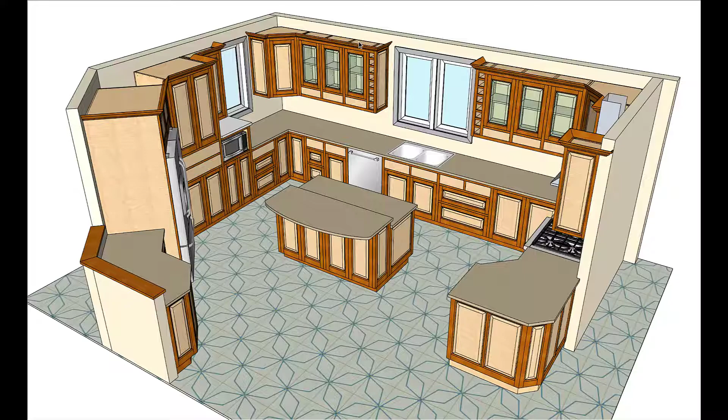Let's begin with CabWriter 5 new functionality. The first new piece is one-piece shaker style. This style applies to doors, draw fronts, end panels, and back panels. It's meant to emulate the simple shaker style of CabWriter, but in a one-piece design that's millable on a CNC machine, so CabWriter will produce the DXF files required to cut these on a CNC machine.

Let's take a look at our typical simple shaker style and convert it to one-piece shaker. The model you're looking at is our typical factory default settings shaker style cabinet. You'll notice the face frame parts are 5-piece parts: 2 stiles, 2 rails, and a panel.

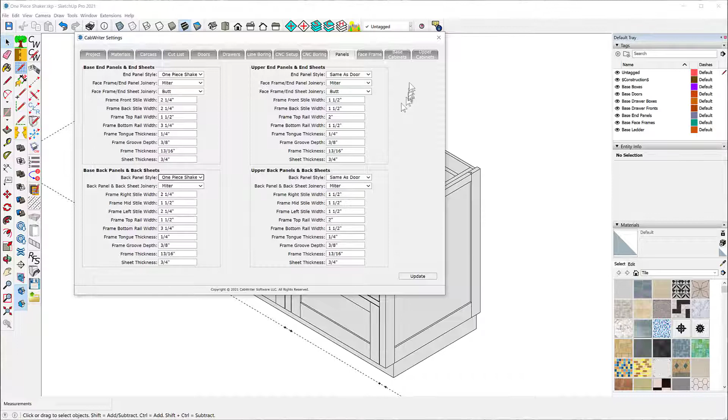The next thing we're going to do is go to the Doors tab and select one-piece shaker. You can do this for the upper as well, but right now I'm just dealing with the base cabinet. I'll go to the Drawers and select one-piece shaker, and I'll go to the panels. For the end panels, I can either leave it as same as door or choose one-piece shaker, and it'll do the same thing for the back panel - one-piece shaker. Now I'm all set, I'll update that and close it.

Now I'm going to redraw this cabinet, but not using the stored defaults, rather the defaults I just set up. So now take a look at this cabinet - notice this end panel is a single part, just one piece with a field milled out of the middle so it looks like the basic shaker style end panel. The same with the doors and drawers - notice those are one-piece parts.

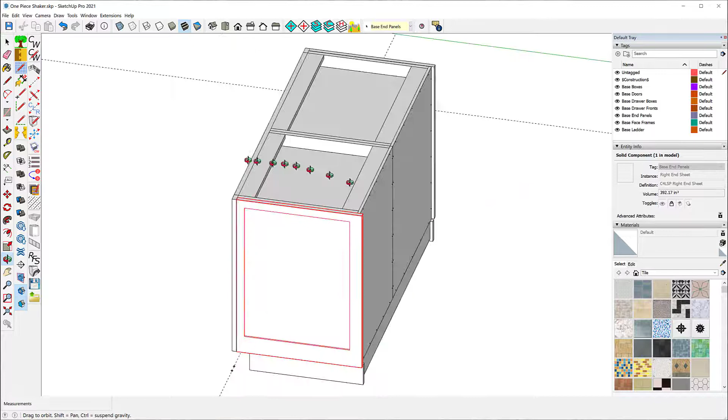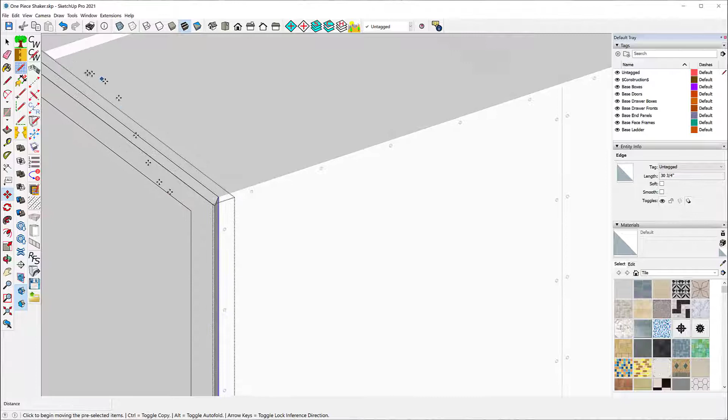Now I want to add a back panel to this. To do that I'll have to edit it a little bit, so I'll unlock it, edit, and bring this in. Let me see what I have to do here - that's 1/2, I have to add 1/4 of an inch, so I'll bring this out 1/4, and bring that part back in here like that. I'm not going to bother doing the other end - actually I have to, so let me do that real quick.

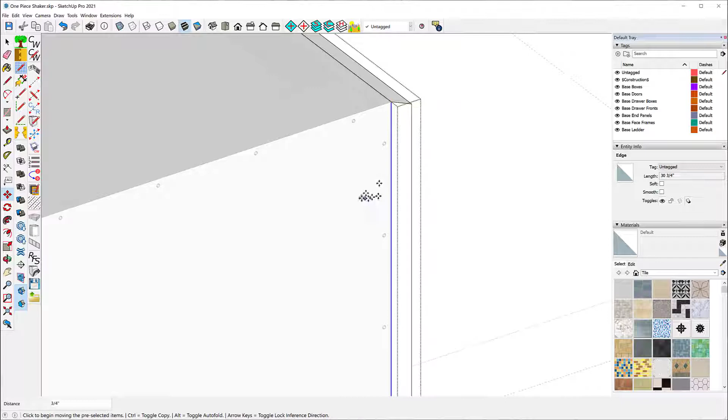Now I'm going to put a back panel on here. I'm going to take note of the cabinet I'm working on, it's cabinet C4L. I'll select this upper line and divide it by 3 - I'll just type 3 into the data field. Now I'll add the vertical lines.

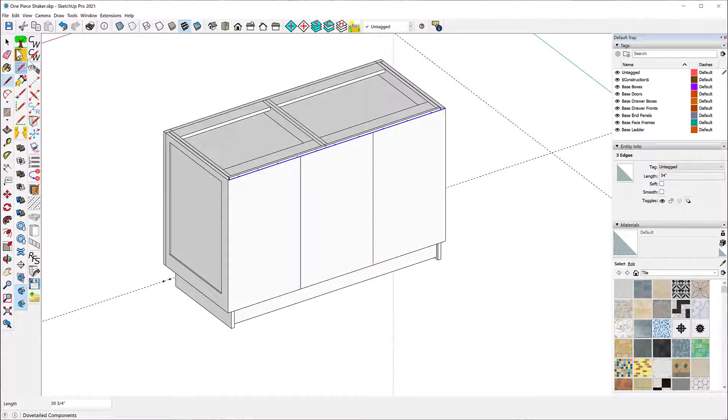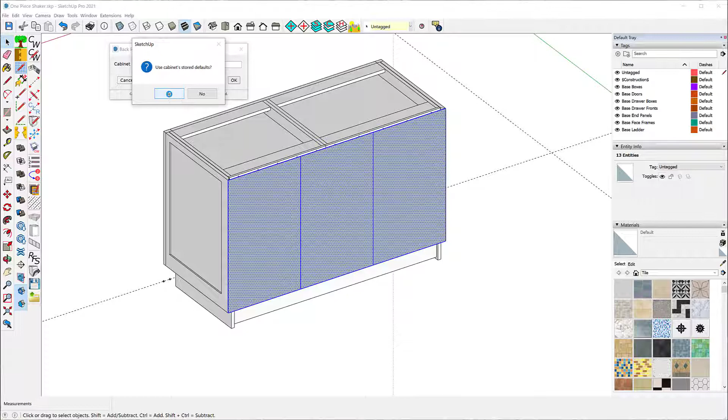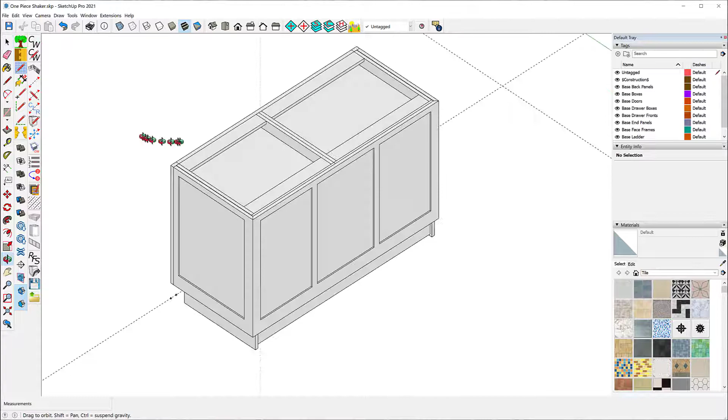And I'm going to add a back panel, C4L, using the stored defaults - yes, that's the cabinet I'm thinking of. And there you go - now I have a back panel, also in the one-piece shaker style. That's as simple as that. You can mill these parts on a CNC machine, and of course they'd be made from some kind of engineered sheet good material.

Now let's go on to the next new piece of functionality. For a long time now, some of our users have been creating tall end panels and doors, inserting mid rails in them using native SketchUp tools. Well, in CabWriter 5 we decided to make life easy for them - divided bases and divided uppers can now have mid rails in end panels and doors.

We didn't include this functionality in standard base or upper cabinets because those are typically fairly short, 30 inches or so. If you want a tall base cabinet or upper cabinet, you would probably use a divided cabinet anyway - you can emulate any of the base or upper cabinets with a divided cabinet. So if you needed mid rails, that's naturally the cabinet to use anyway. So this is our solution for mid rails.

What you're looking at is a variety of cabinets with mid rails in end panels and doors. Let's just take a look at some of them. Now, the refrigerator cabinet is an upper cabinet.

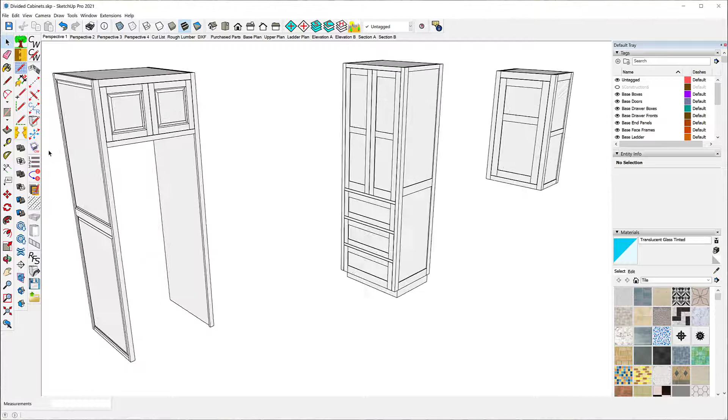And it's an obvious one where you would want a mid rail because the end panels tend to be tall, mostly because they go to the floor in most cases. So let's just look at what you need to do to create that.

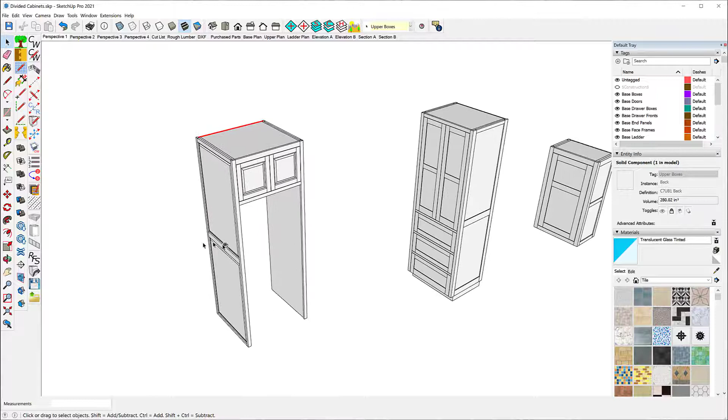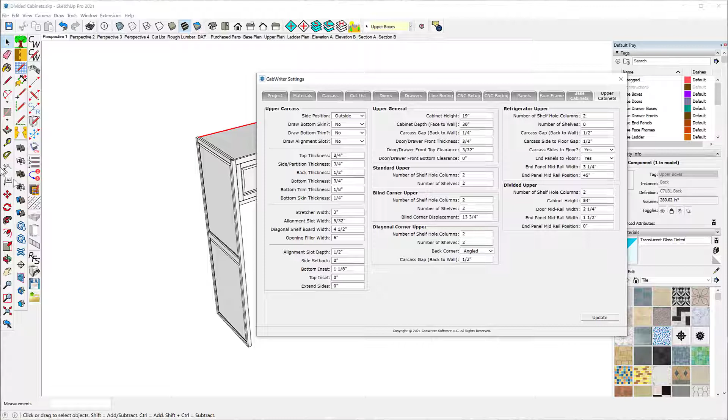Like I said, it's an upper cabinet. And you'll notice for the refrigerator upper, there's 2 new parameters: end panel mid-rail width and end panel mid-rail position. Notice the position is 45 inches, measured from the bottom of the panel to the midpoint of the mid-rail. I'll just show you that here.

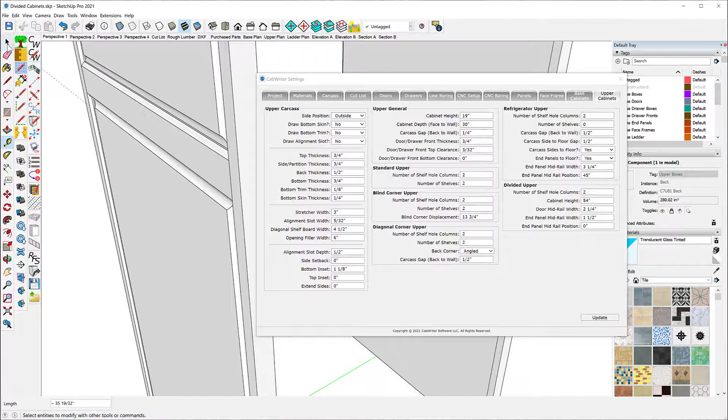We'll go from here to the middle of this, which is right there, and notice that's 45 inches. So that's how you specify the position of the mid-rail. And the width of the mid-rail, if I just use this tool here and click on it, you will notice down here that the width is right at the bottom. The width is 3 1/4, just as it says here.

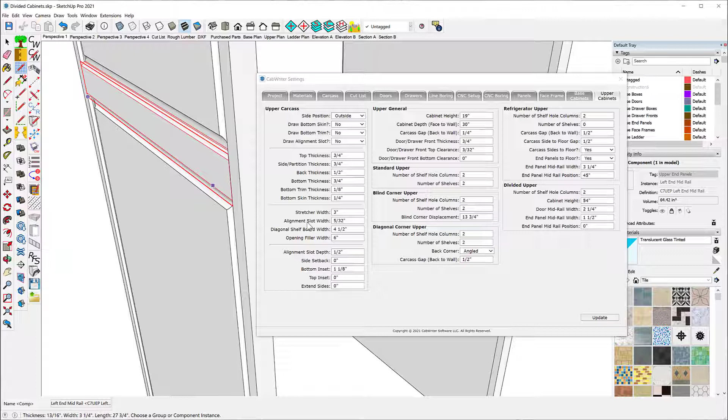Now, if you don't want a mid-rail, you would leave this at 0. Make that parameter 0, and that's an indication that there's no mid-rail to be drawn. Notice when the mid-rails are drawn, you get 2 panels, and you will see that difference in all of your production documentation. I'll show you some of that in a bit. So that's the refrigerator cabinet.

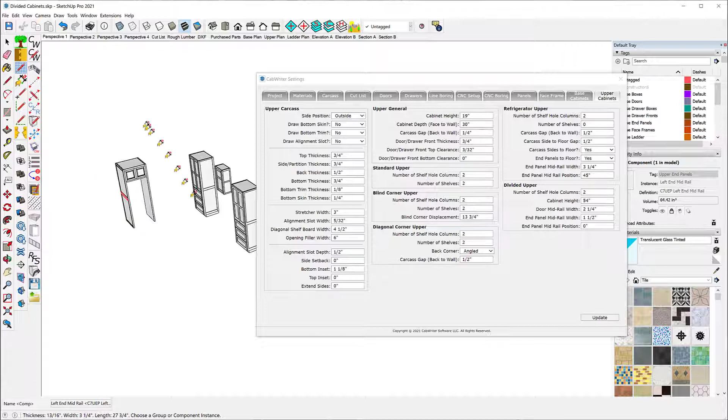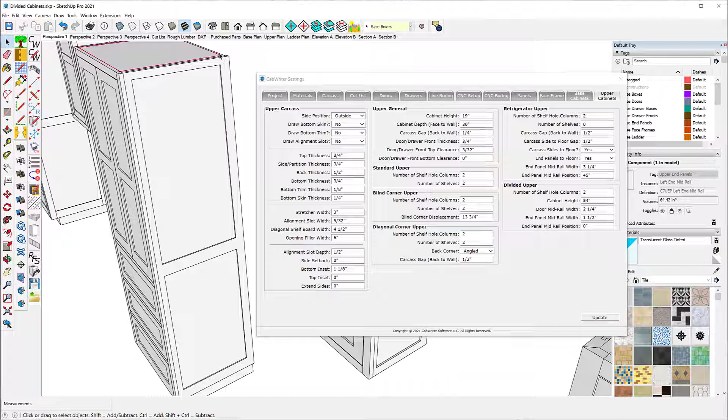Now we can do this with any style of cabinet. For instance, well, here's the basic style. And again, this is a divided base. So I would look, let me select the back here and look at the defaults for this cabinet. And let me look at the base.

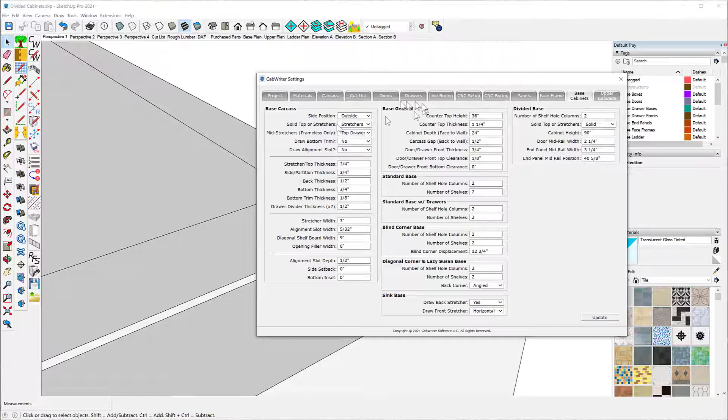Notice on the divided base, you have a door mid-rail width, the same thing here, end panel mid-rail width, and an end panel mid-rail position. So the position of this mid-rail, regardless of the style, either this standard basic style or this one-piece shaker style, you can place a mid-rail anywhere you want. And again, this is measured from the bottom of the panel to the center of the mid-rail.

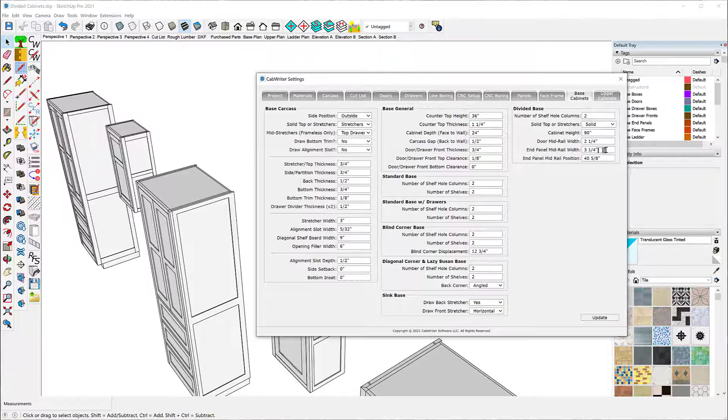For the doors, the mid-rail width is different than the width of the end panels, and you can see that here, they're narrower. Now, how do you specify the position of the mid-rail for the doors? Well, let's take a look at one of these.

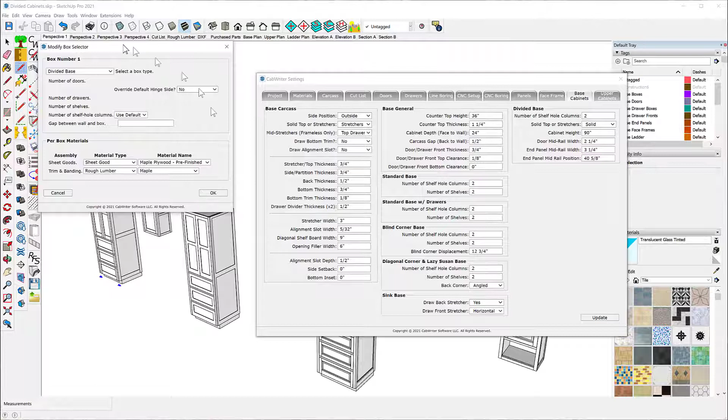And remember, these are divided cabinets. So I'm going to edit this cabinet, and I'm going to use the stored defaults. This is the normal modify box selector you get. And it's saying it's a divided base, and I'll bring over the divided base dialog box. Notice there's another column here called mid-rail.

Further, you will notice that in the option column, there's an additional option. It used to be just door, drawer, or none. Now it's none, door, divided door. So if you want a mid-rail in a door, you choose divided door. You can choose one or two divided doors, and then you can specify the position of the mid-rail, again, based on the distance from the bottom of the door to the center of the mid-rail.

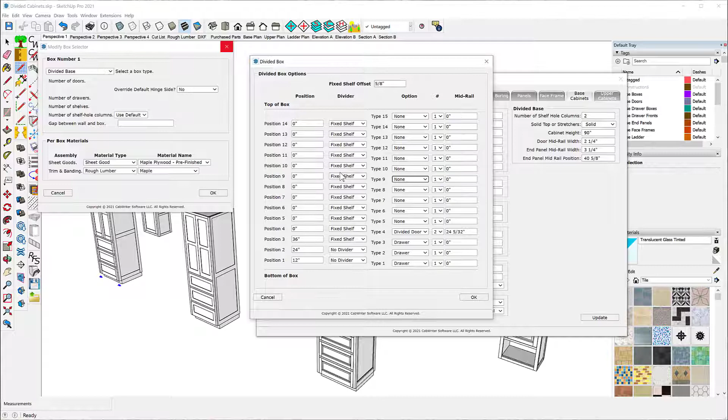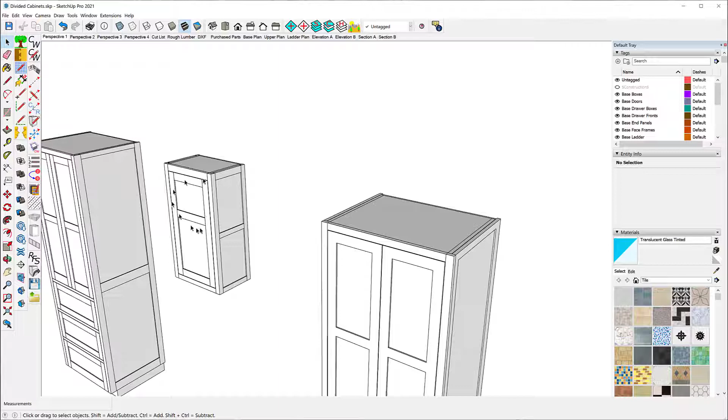So this is a change in the divided cabinets, this new column, and this additional selection here. So it's as simple as that, no more to it. Well, I'll cancel out of here. And again, notice that you can use this in the simple style of shaker, in the one-piece shaker, or with the raised panel styles of doors and drawers and end panels.

Okay, so now let's move on to our next new functionality. One of the most exciting features, new features in our CabWriter 5 release is automatic texturing. Most users are aware of how important texturing is to create something that looks like a photorealistic image of their models to show their clients.

Well, now CabWriter textures cabinets as they are drawn. Or you can texture a whole model at once, or just a selection of parts. CabWriter comes with 11 factory installed high quality grain textures, but we also have on our website approximately 250 other grain textures that you can download and install in CabWriter.

And textures are a parameter, just like any other parameter in CabWriter. So you can change them while you're editing them. You can set them up when you first draw a cabinet, or you can just choose a set and repaint the entire model. So let's take a look at how this works.

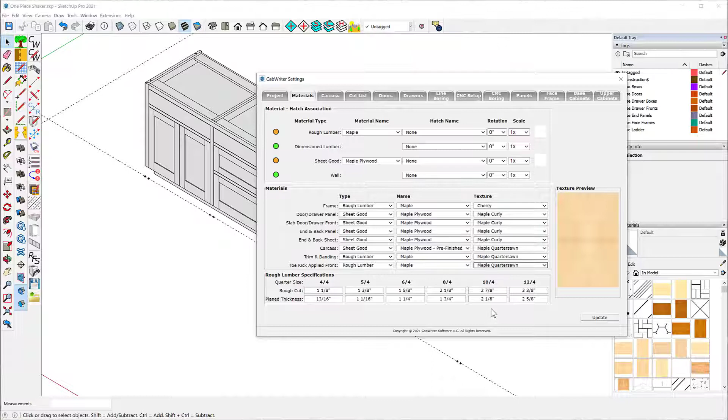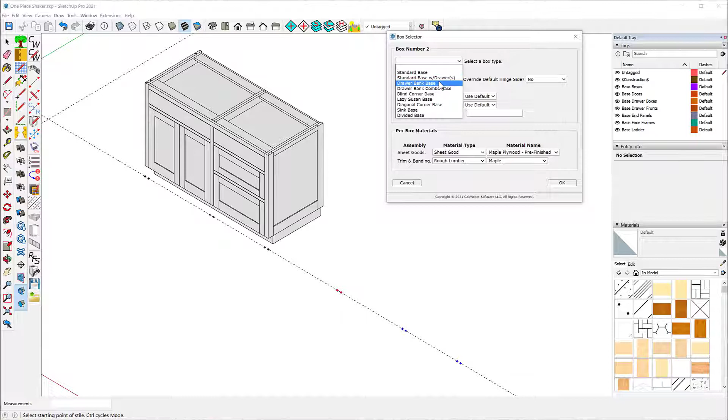And I'll update that. So I've got this laid out for the same cabinet as here. Let's see what happens. Okay, the first cabinet is going to be a standard base with drawers, 2 doors, this is going to be a drawer bank base. Just say OK.

And there you go, totally textured. If you look closely at the quality of these textures, you'll see they're quite high. The other thing you want to notice is that it gets the grain direction correct.

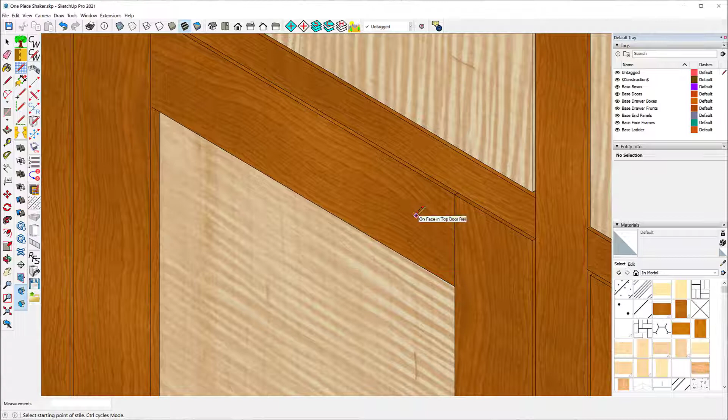Notice for the rails, the grain direction is this way. For the stiles, it's this way. That's also true on the inside of the cabinet. It will get the grain direction correct based on our automatic grain direction capability in CabWriter.

So how does this happen? Well, like I just showed you, you go to the Materials section, and you want to do this probably right at the beginning of your model. Just set up the textures.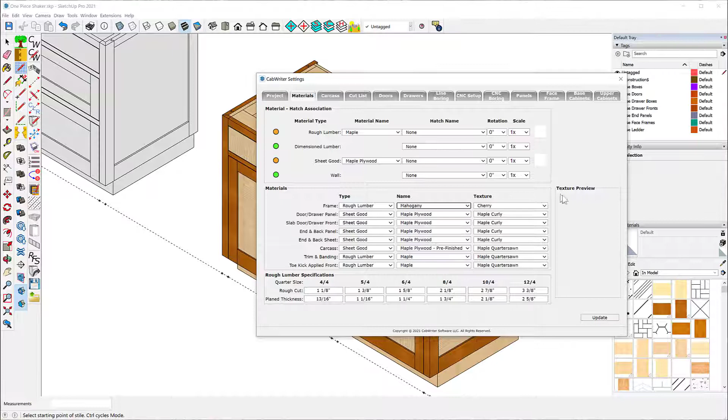Now suppose I want to change it. I can simply say, let's see. Let me make this mahogany. Actually, let's make it walnut. That's a panel.

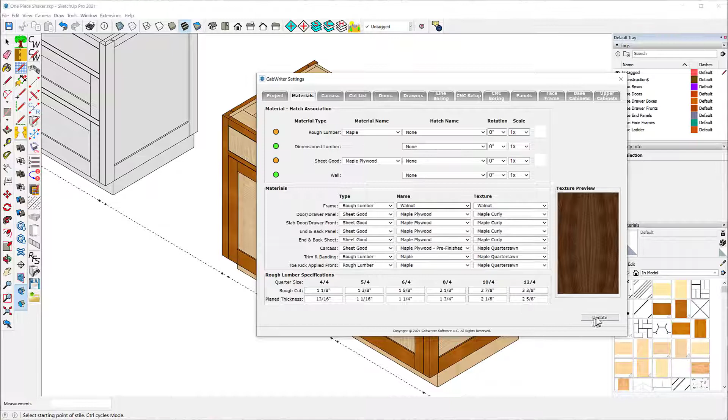I'll leave that curly maple, and everything else I'll just change the hardwood. And I can update this. I can redraw that selected cabinet.

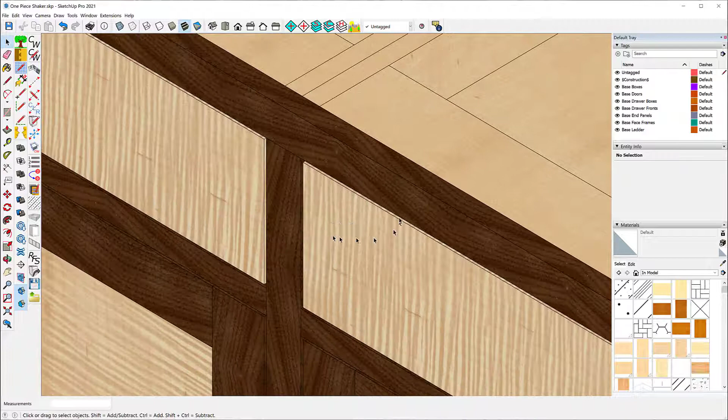And no, I don't want to use the stored defaults. I want to use the new one I just set up. And there you go. So now we have a different grain, color, and pattern. So anything that redraws the cabinets or edits the cabinets, you could change the textures at the same time.

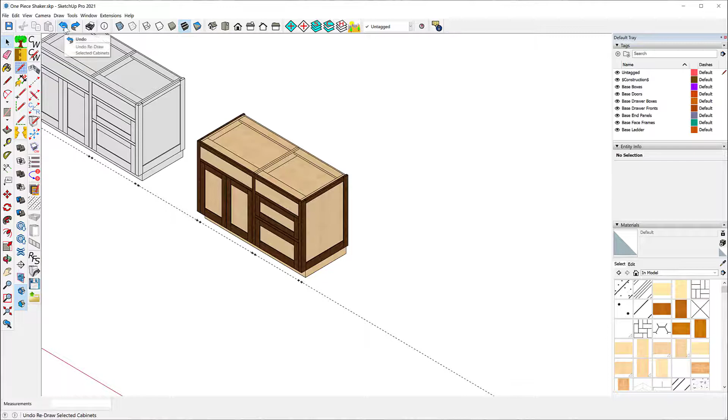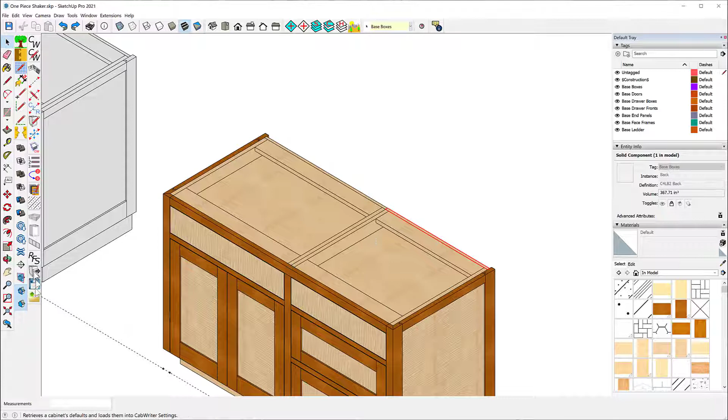Let me go back to this more pleasing looking color. There we go. All right, now let me bring out these defaults and just check them to make sure. Okay, they're what I want.

So now I can redraw this cabinet. Say no. And there you go. Now I'm going to back that up.

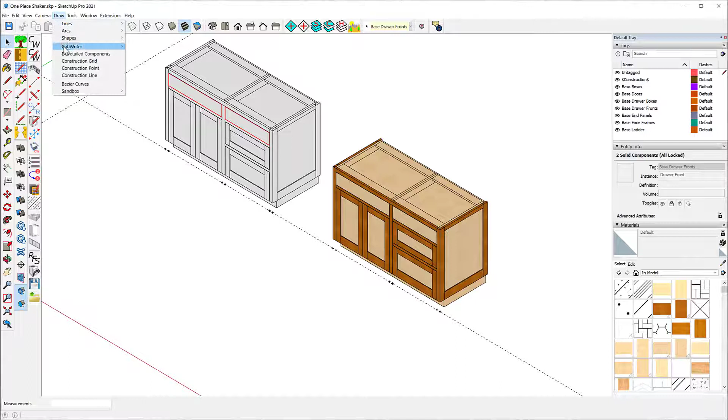And suppose I just want to texture one or two pieces. I can select them, go to Draw, CabWriter, Texture Selection. And notice it knows that these are the hardwood drawer fronts, and it uses the correct texture for that based on the way I had the parameter set up.

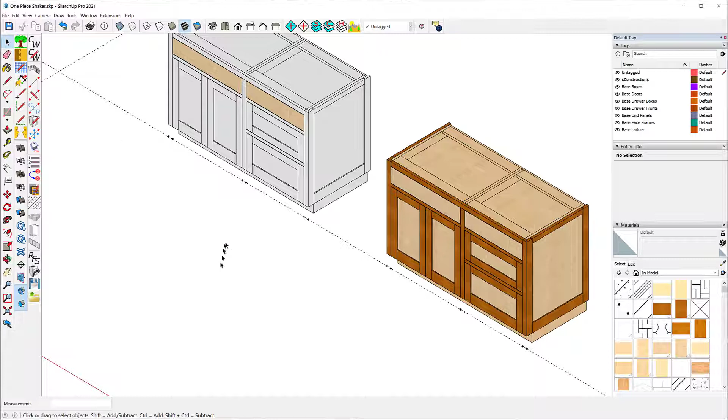Now if I want to, I can texture the whole model all at once, and that's what I'm going to do right now. Go to Draw, CabWriter, Texture Model. And there you go, the whole model was redrawn. Well, actually, the model was not redrawn, just the textures were changed in the model. So that's basically texturing.

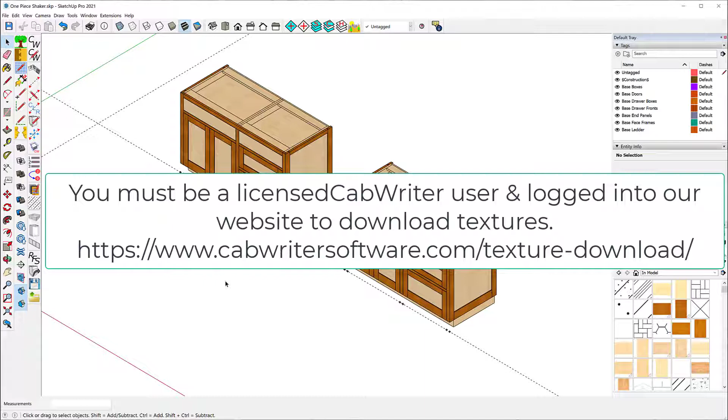And like I said, you can go to our website and you will find a place where you can download up to 250 different grain patterns. And in the manual, there's a whole chapter in the user's guide on texturing. It tells you how to create your own textures if you want to and install them, or go to our online site, download them, and install them. So this is, like I said, one of the more exciting features of our new CabWriter 5 release.

Okay, so let's move on to our next new functionality. In CabWriter 5, we expanded the Create Basic Scene Set command to automatically include all necessary elevation and section views. Elevation and section views take a long time to create. So we discovered an algorithm for analyzing the model and figuring out which views were required, the minimum set required for a complete shop drawing set.

Now, even though we create all of these automatically, you can still add to the set anything you want, and you can delete any of those that are created automatically, and or you can edit and modify any of the scenes created automatically by CabWriter. But we've reduced the amount of work you have to do substantially with the creation of elevation and section views.

So let's see how this works. Notice in this model that I have no scenes at the moment, none at all. In fact, you can see that down here under the Scenes tab, there's no scenes at all right at the moment.

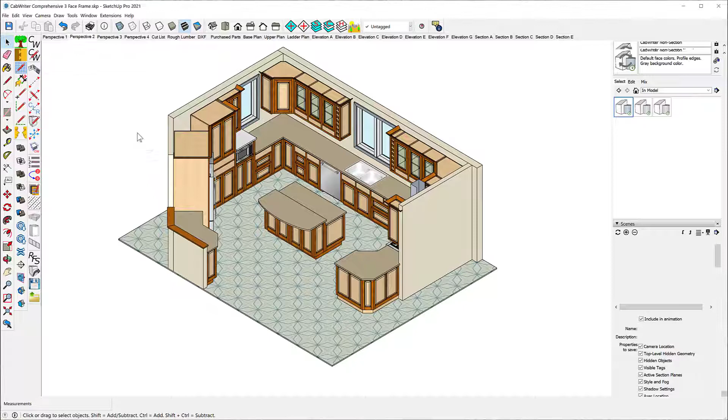Okay, it's completed. I counted these once, and I think there's about 23, 24, or 25 scenes that have been created, I forget which. That's quite a few scenes. If you had to do those manually, that would take you quite a while.

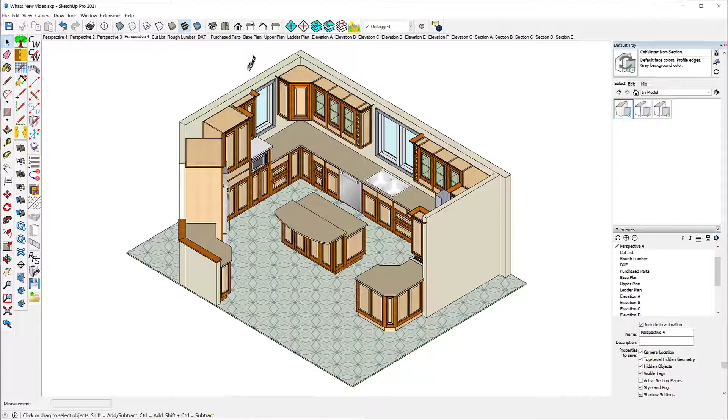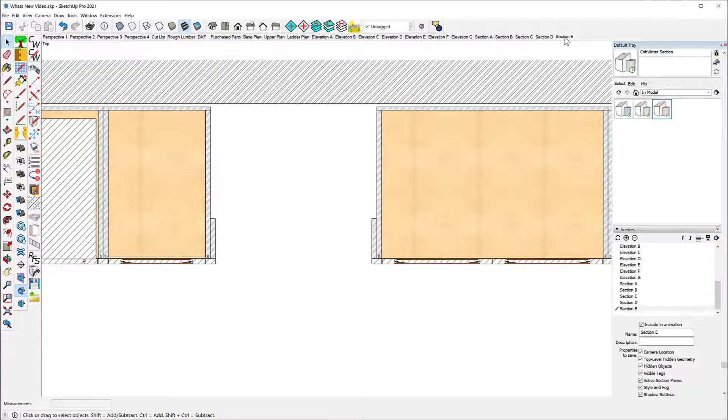Let's just look at them. For instance, the base plan. Notice right off the bat that in addition to the hatching, we have the textures included in the base plan. And I think that's true for all of the sections and what have you.

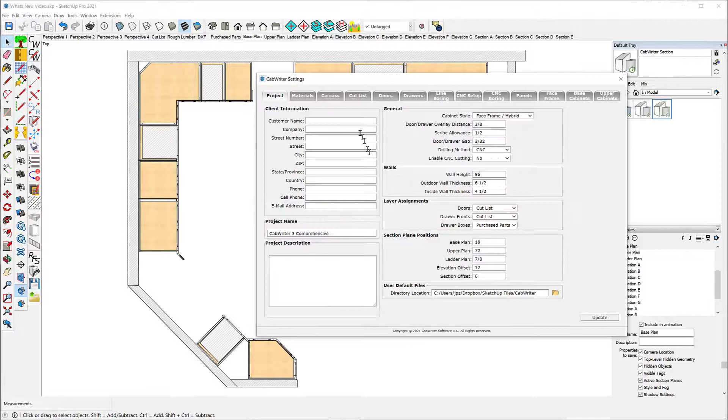Now, you have to make a choice here. If you make shop drawings out of drawings like this, you're going to use a lot of colored ink on your plotter. So what you might want to do is, before you do shop drawings, go back to the default on all of the inputs, the default for texture on all of the inputs. Then when you create these shop drawings, these will look normal.

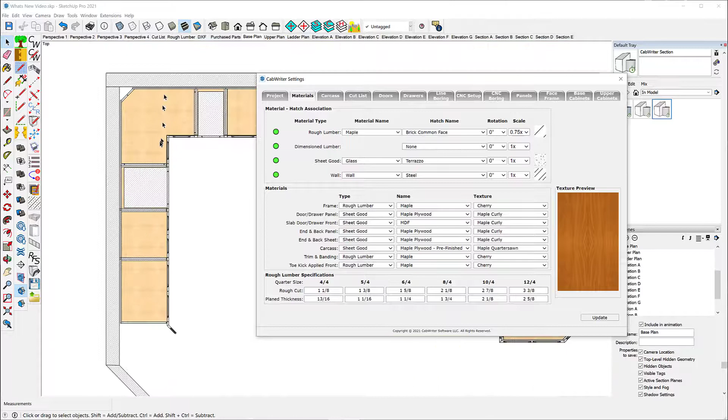They will just be white here, and the only thing you'll see is the hatching. Everything else will be white or gray. Now, the reason for this is hatches and textures are in fact materials. Both of them are materials, and that's what these parts are painted with. So you can't have one without the other unless you don't texture using the texture tool.

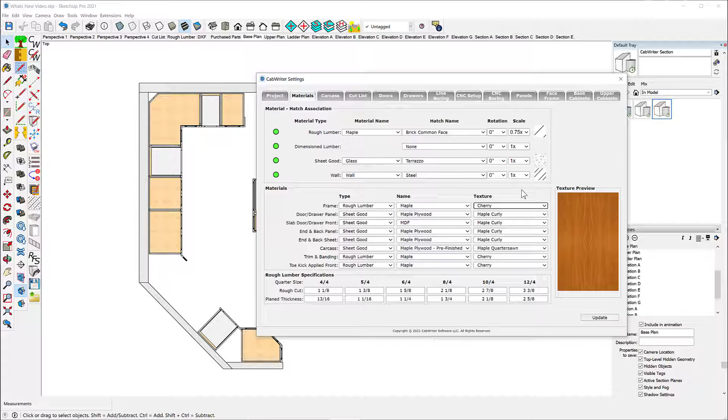But because you have this tool called Texture Model, you can simply switch all of these back to default and then texture the model with that, and then come back and retexture the model with these settings. So it's a little bit of a nuisance, but it's a function of SketchUp. We in CabWriter don't have any control over that. So that's just something you have to look out for.

But that aside, we now have our usual 4 perspective scenes: our cut list scene, the rough lumber scene, which is kind of new, but I'll explain that in a moment, the DXF scene, purchase part scene, base plan, upper plan, and ladder plan.

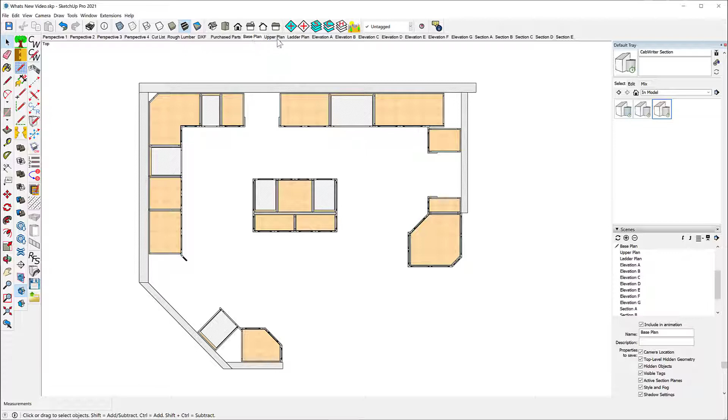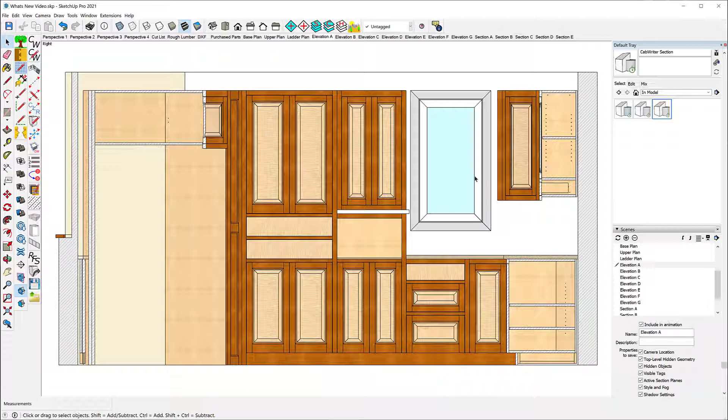But now we've got 1, 2, 3, 4, 5, 6, 7, 8, 9, 10, 11, 12 sections and elevation views. Let's just look at them. This is your primary elevation, probably looking at the north wall or the wall with the... no, that's not the sink wall, that's the west wall. There's the sink wall.

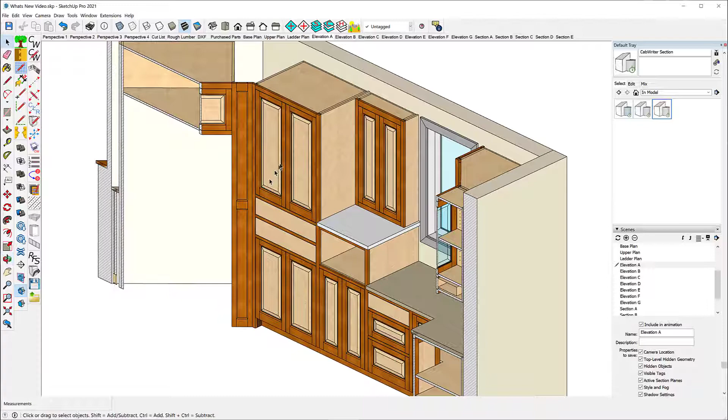And why do we have 2 elevations of the sink wall? Oh, one is looking at this cabinet. And one is looking at this cabinet. Okay. So this one includes the island. And so in this view, we'll get to this in a moment.

In this view, what you may want to do is eliminate all of this stuff. And I'll show you how to do that, I think in part 2. So in this view, you just may want to eliminate everything but the island here. So when you look at this view, you'll get just the island. And you can, of course, blow that up.

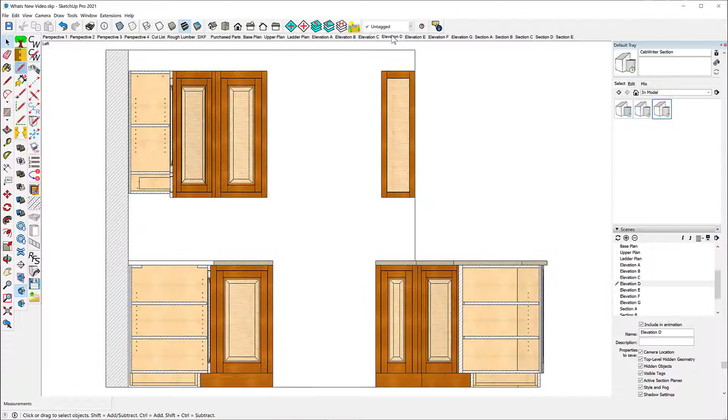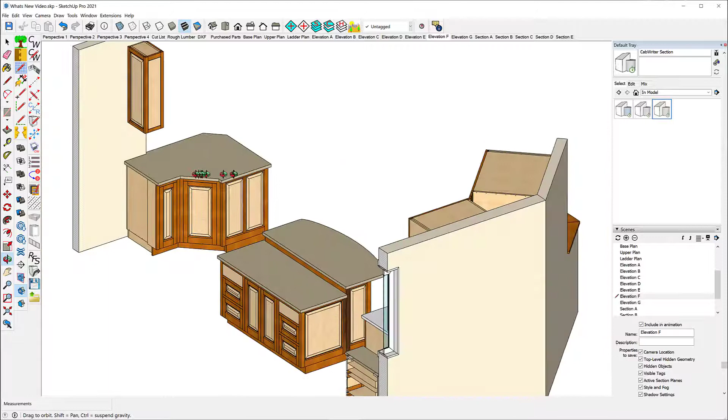This view is of the east wall. That's southeast. Oh, that's the other side of the island. That's the inside side of the island. The window is over here. And that's of the refrigerator.

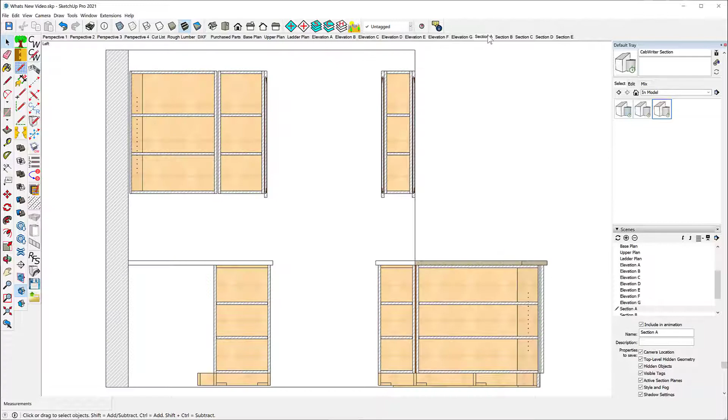And again, you know, you can go through these and you're going to have to modify them a little bit. I'll show you in a second what I mean. This is the window.

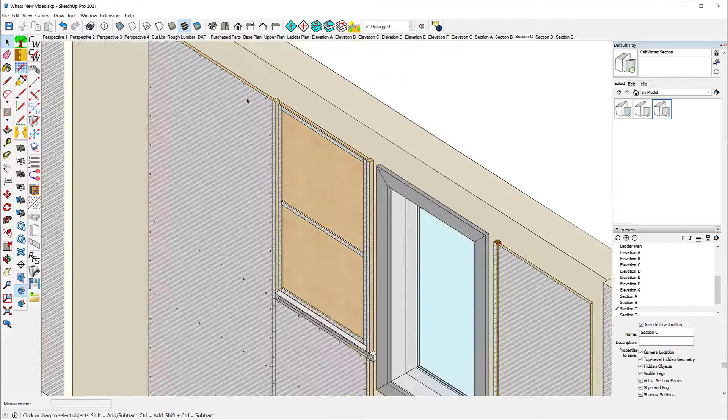Okay, now let me explain this one a little bit. Let me let this do a file save here. What you have here is some backs of the cabinets that have been cut into. So let's look at the sections here.

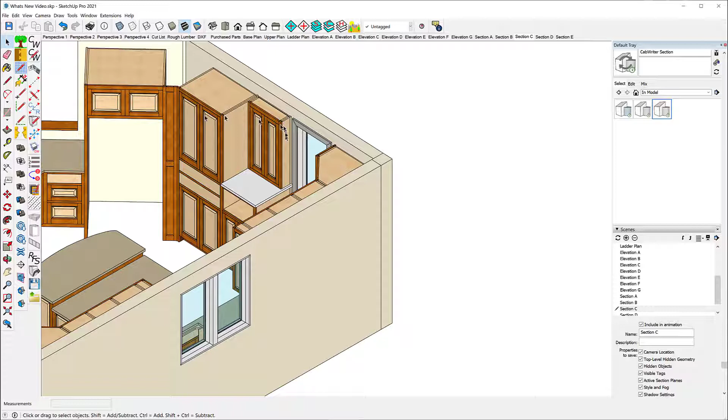If I get rid of the sections altogether, notice that this cabinet is very shallow. It's, I don't know, it's like 6 inches or something like that. And so when it does its analysis of this, it knows it needs a section view of this. So what it does is it takes the face of this and goes back some number of inches. Well, the number of inches it's going to go back is shown down here.

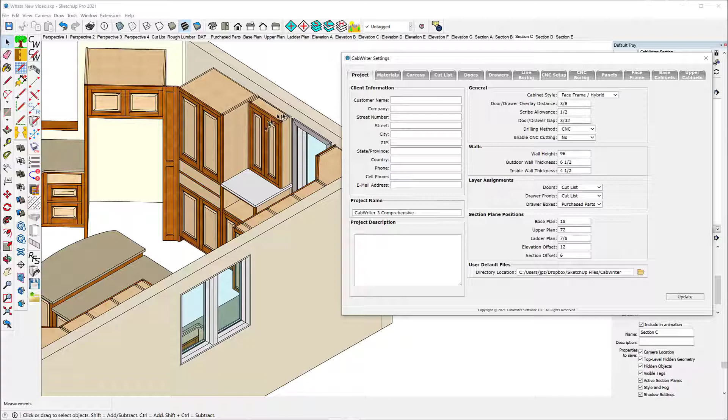Notice that the elevation offset is 12 inches, the section offset is 6 inches. So the analysis looks at this and comes in 6 inches from this face. But the cabinet itself is only about 6 inches deep. So what happens is you get a section cut that is right on the face of these back panels right here. Notice this section cut right there.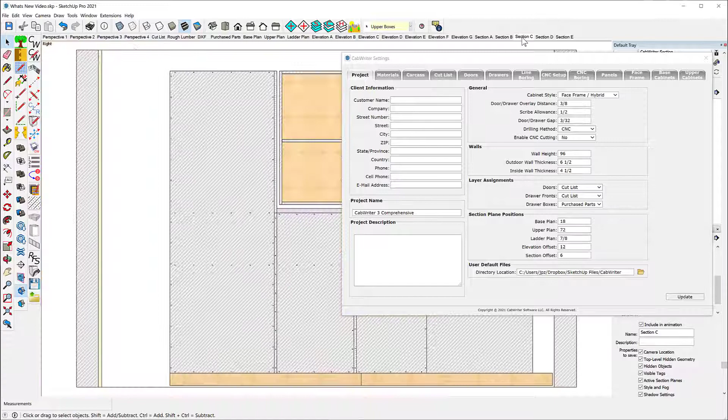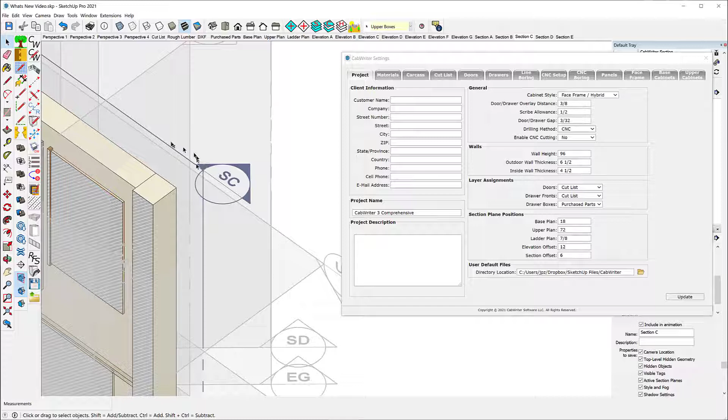So the way you can fix this is bring in the section cuts again. In fact, let me just select C again. Now let's look at our section cuts. And notice this was section C. We'll see this SC. That's telling you this is the section plane that's controlling that.

And I might as well explain that right now. One of the things we've done in CabWriter 5 is we've labeled all of the section planes that are used. For instance, BP stands for base plan. UP stands for upper plan. LP stands for ladder plan. And then all of the sections start with S. So this is SE, that's section E. This is elevation E. And like I said back here, the one we want to work on is section C.

So what we're going to do is we're just going to move this out here.

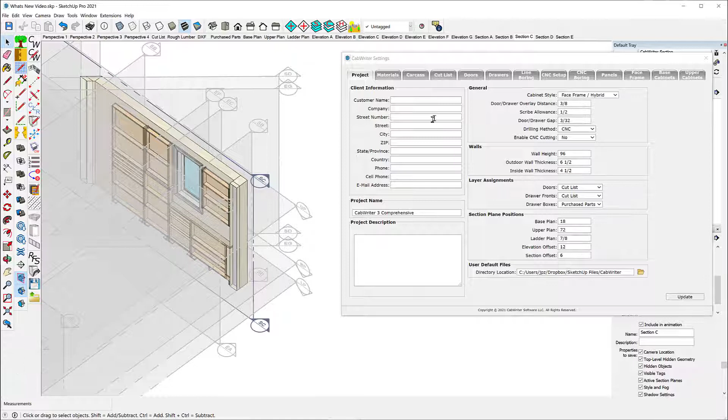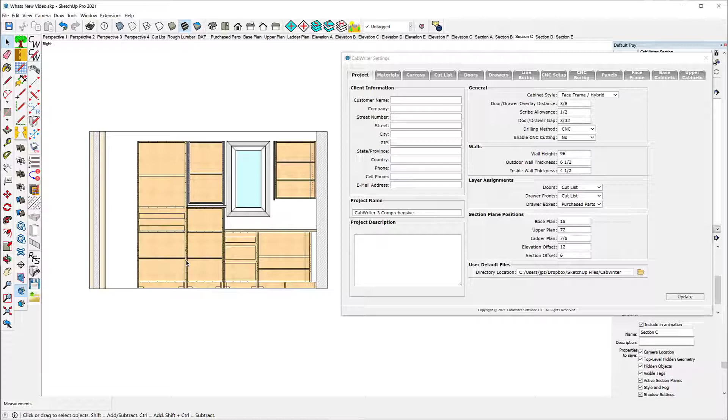Let's go back to section E now, or section C. And now you notice you don't have that cutting of the back panels. So you will have to do a little fixing up of these sections and elevation plans, but the amount of work you have to do is rather small.

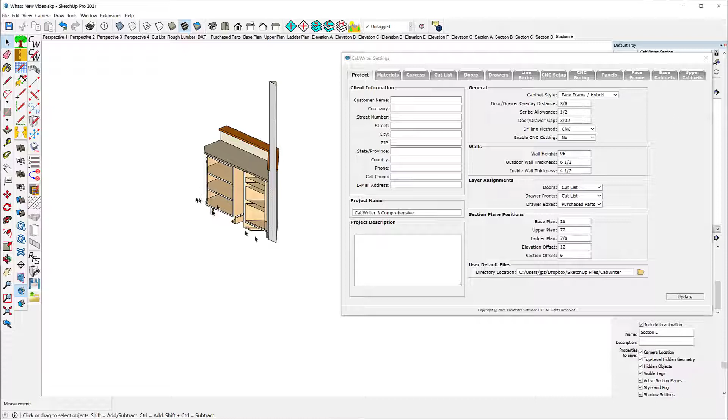Section D, that's the refrigerator, taking a section of the refrigerator. And section E, that's taking a section of the little half wall, the cabinets on the half wall. All right, so there you go. You've got all the elevation and section views.

And so now let's move on to our next new piece of functionality. In CabWriter 5, we've added a new report to the CabWriter production documentation tool. Once you've created your reports and you open the folder that they're stored in, you'll notice a new schedule called Box Schedule.

Now, Box Schedule is used for project costing. An awful lot of our clients, cabinet makers, determine their project cost based on the number of boxes in a model, the width of those boxes, height, depth, number of doors, number of drawers, number of shelves. So for each type of cabinet and for each size of cabinet and for the number of doors, drawers, and shelves, they have a budgetary costing that they can use to develop the total project cost. So this schedule is meant for project costing. Do not use it to get information for fabrication. It's just project costing, so treat it that way.

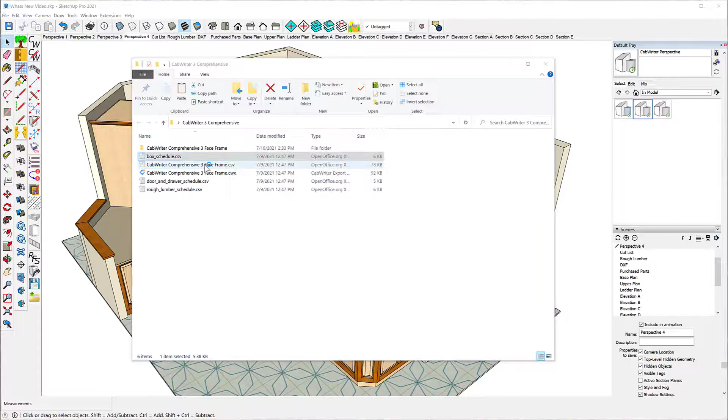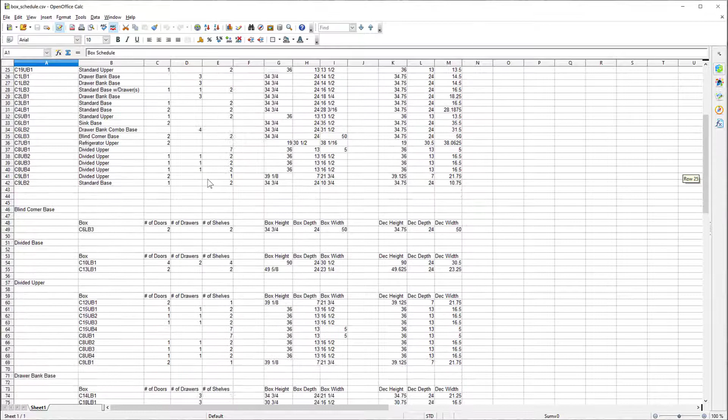Now that's sorted by box number. The other way we've sorted it, and this can be used as a good check to make sure everything's included here, so you can quickly go through your model and make sure all the boxes have been included. But we've also given you a different breakout, and this time we break it out by box type. So blind corner base, there's only one of them here, but it's got the same information. Divided bases, there's 2 divided base cabinets. Divided upper, there's 2 divided upper cabinets, but quite a few boxes. And drawer bank base, so on and so forth down the line.

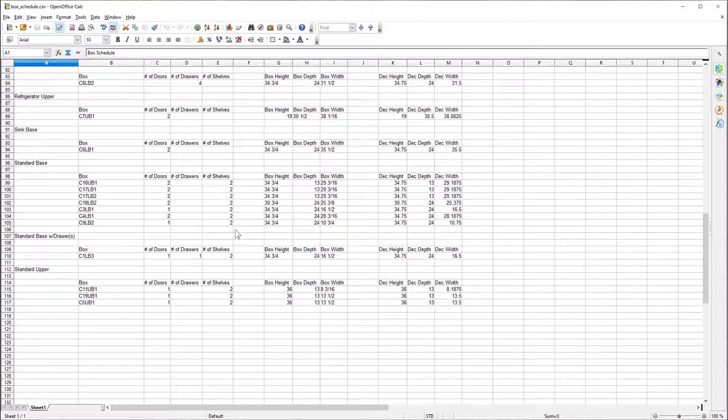So again, this report should be useful for project costing. Well, that's it for part 1.

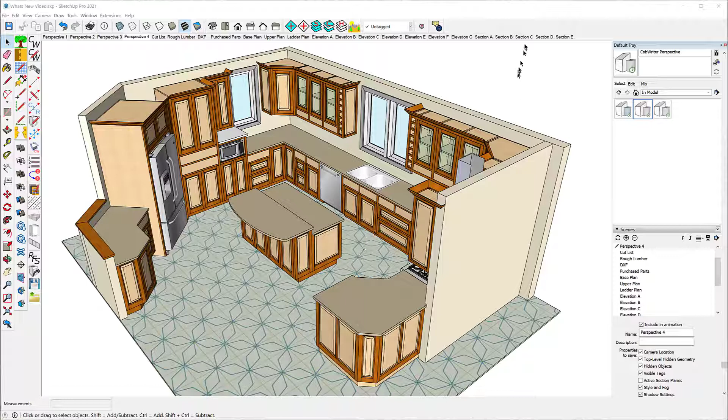In part 2, there's a number of new pieces of functionality, things that have been changed. For instance, the Stiles and Rails report is now a rough lumber report, and we'll tell you about that. The sheet optimization settings dialog box has changed substantially and is more helpful, we'll describe that. The sheet good layouts and CNC layouts for sheet goods, we've added some functionality so you can move parts around, and that's useful for things like grain matching of parts, we'll talk about that. We're going to show you how to eliminate cabinets or parts or numbers of cabinets in a scene, like we needed to do for section C. Oh, not section C, but I guess it was elevation B. What we wanted to do here was get rid of everything but the island. And we'll show you how to do that with some new functionality, or modified functionality, in part 2.

Construction holes have always been through holes up till now, but now you can define construction holes as partial holes, that is, they have a depth that's not through the sides. And that's useful if you want to use things like dowels and stuff like that. We have some support for CAM software where you can actually include the 3D depth of things, whether they're holes or any shape in your geometry. You can give it depth, and the depth will appear in the DXF file, because some CAM software packages actually use that information. Others get confused if it's there, so it's selectable.

And lastly, we'll talk about the ladder base. Up till now, the ladder base thickness and the carcass thickness were the same, typically 3/4 of an inch. Now you can specify a different thickness for the ladder base, and we'll show you that.